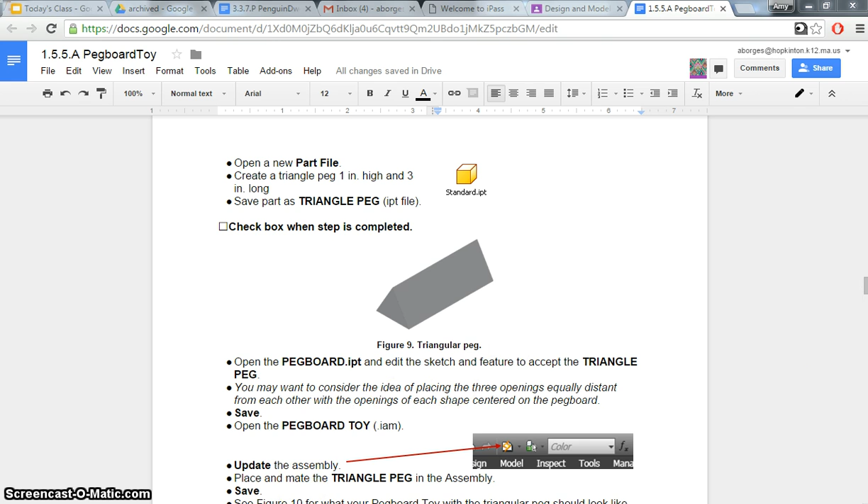So open up Inventor, and we're going to start a new part. We're using standard.ipt.

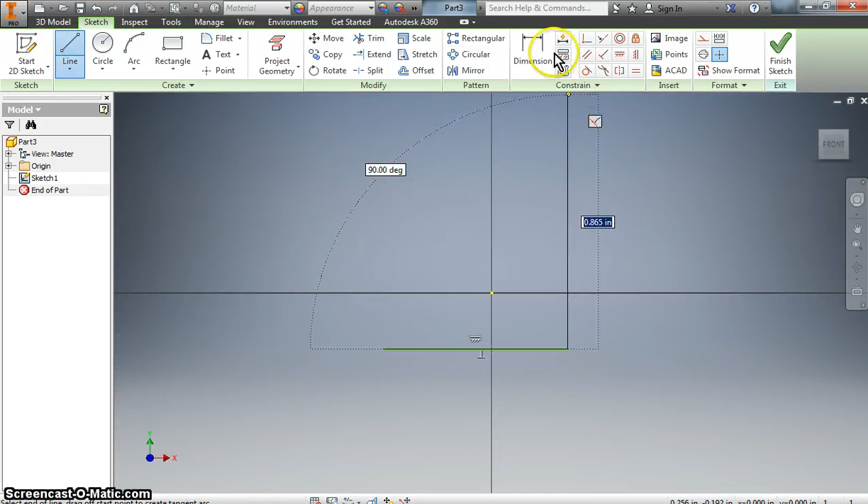To draw the triangular peg, we're first going to place line segments for the base of the triangle as well as the height of the triangle. So I want the base, and then I'm going to dimension it to 1 inch.

Go back to line. In order to ensure that I'm drawing my line height right in the center of this base segment, I'm going to put my mouse along, and it's yellow now, and when it turns green, that means it's the center point. So it turned green, click once to start the segment, click again, dimension that to 1 inch.

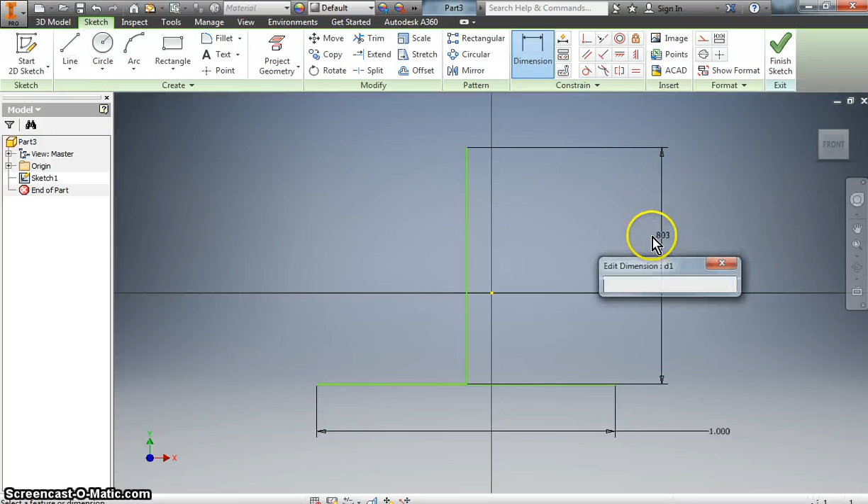Now we can go back to line and connect the top to one side of the base and the top to the other side of the base. Can finish the sketch. We'll go to extrude.

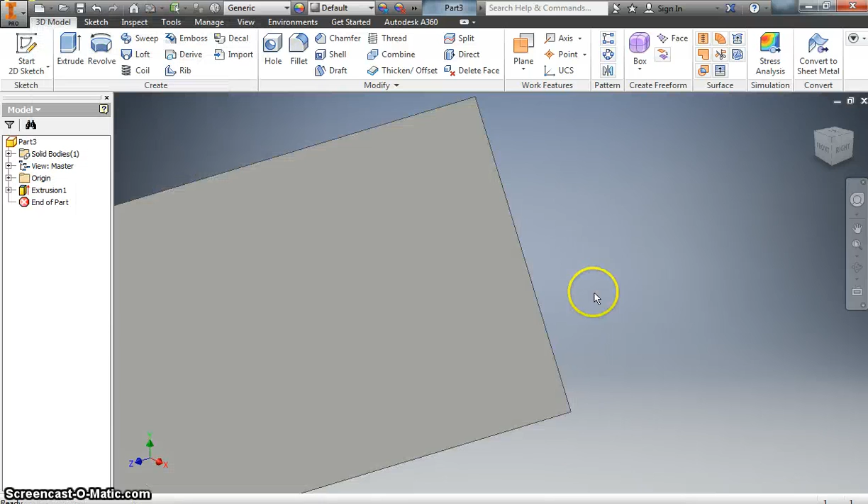I want this peg to be similar to my other pegs, and I'm going to extrude both halves, a 3-inch extrusion. Now you can first change the material and then change the color.

Orange is nice, so File, Save As, triangular peg. I'll call it 2 because I had made one earlier today. Say save.

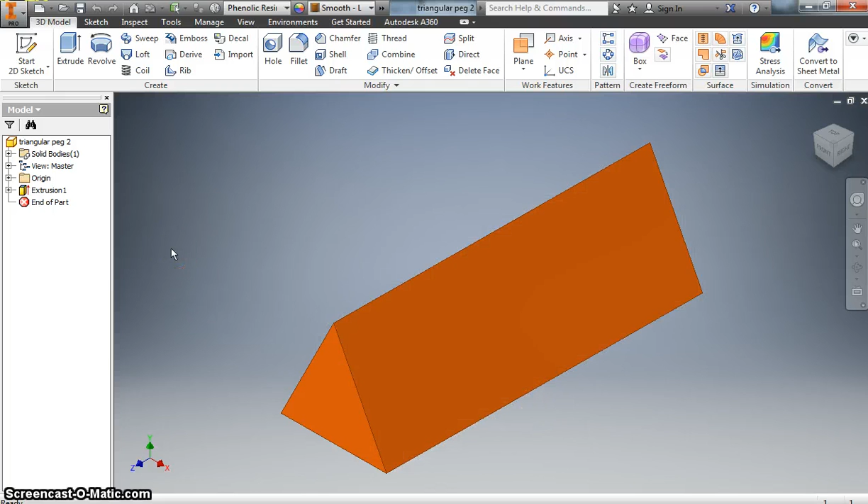Now we need to go back and modify the pegboard toy to have a triangular cutout so that we can place this peg. Go to iPro, open, and you want to open your pegboard toy assembly with the ends.

So we want to modify this purple piece. It's purple in my example. So you can double click. Once you double click, you see the browser shows you what you're able to edit. So you want to edit the sketch that had the circular and square cutout, which for me is embedded in Extrusion 2. So I click the plus sign, and then I'm going to right click the sketch and edit that sketch.

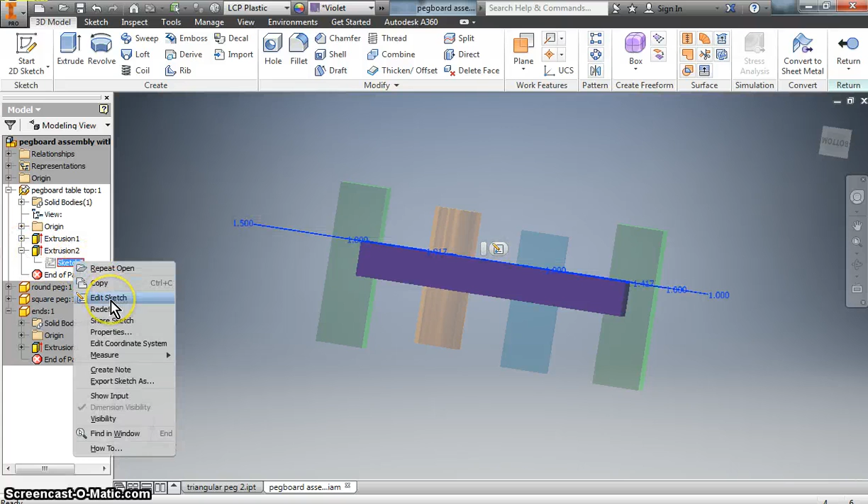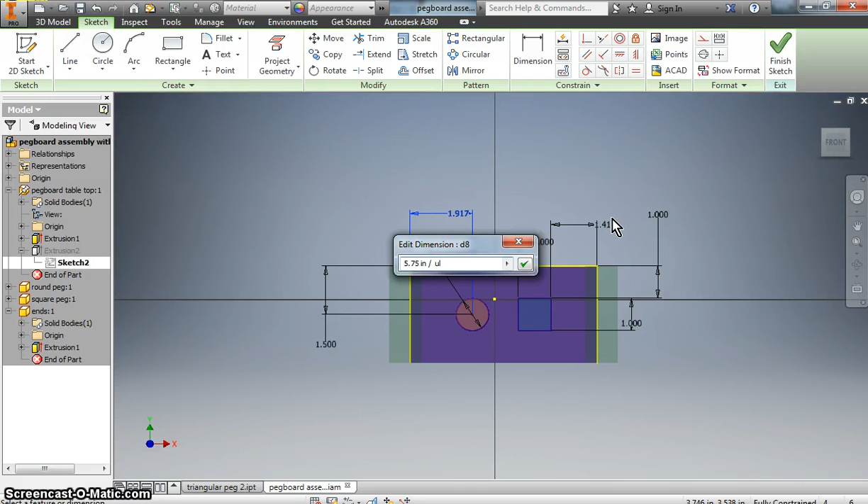Turn the view cube around. Okay, so I want to go back and modify my horizontal alignment dimensions. The horizontal alignment dimensions will provide space horizontally for the triangular peg. So I'm going to double click this figure, and instead of divided by 3, I'm going to change it to divided by 4, which will make room for our extra feature.

And I'm going to double click this one. Instead of divided by 3, I'm going to change it to divided by 4. And then I can finish my sketch. They didn't move, so go up to this top bar and click Global Update, and they will move.

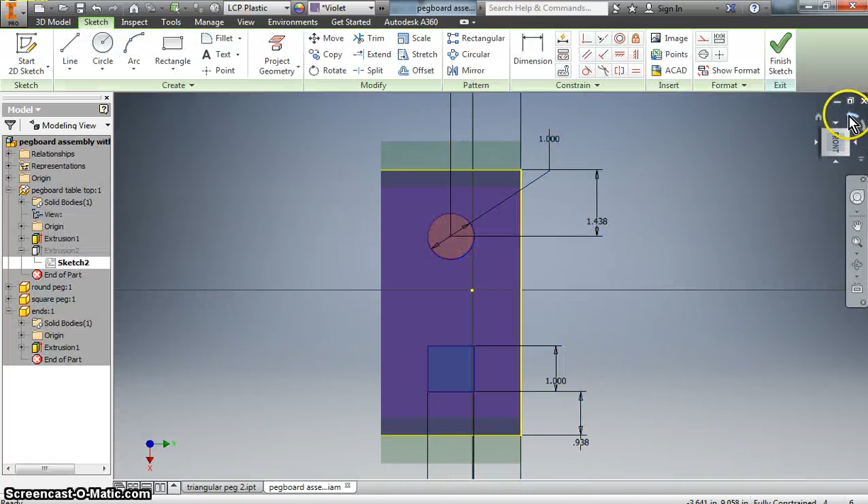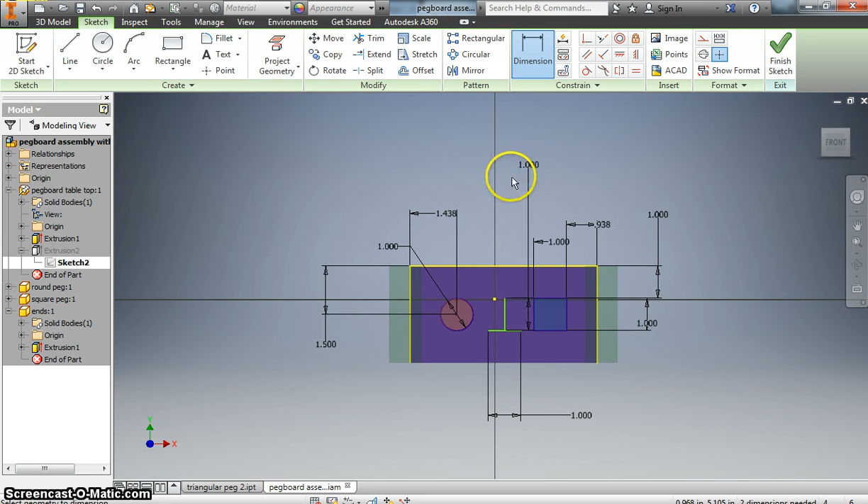I'm going to go back to sketch 2 to edit and make the triangular cutout. I'm going to make the triangular cutout just like I made the triangular peg, with a base of 1 inch and then a height of 1 inch, and remember to put the height directly in the middle. And then make the triangle complete.

And then I can space the triangle cutout. I need to make sure that the base of the triangle to the edge of the tabletop is 1 inch, which it already is for me. And then the center height line of the triangle to the edge of the tabletop should be 5.75 divided by 2.

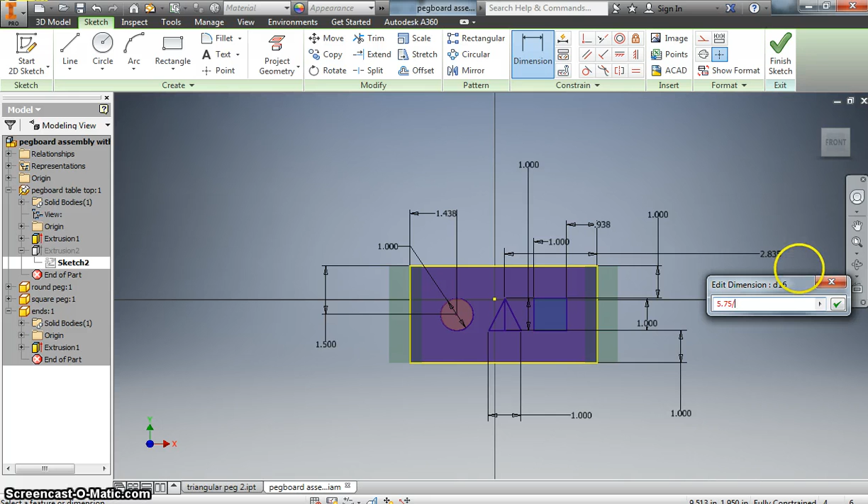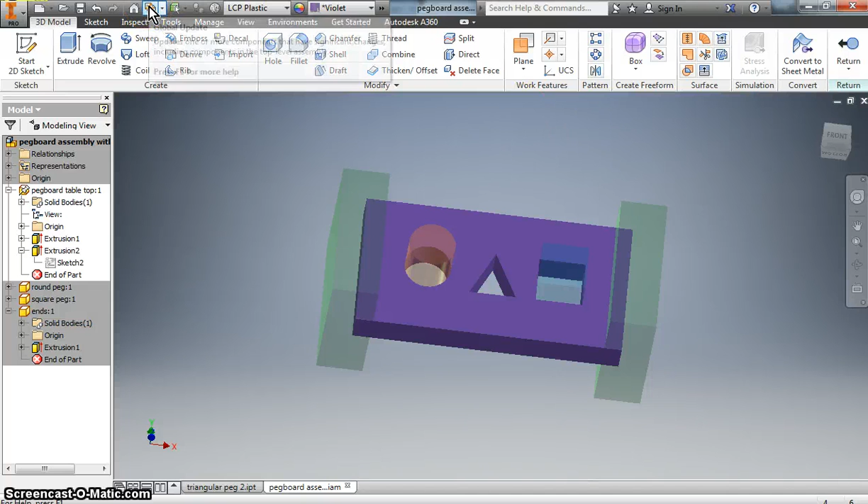Can finish the sketch. Now it still didn't cut out that feature, so we need to go back to extrude. Use this button to edit the extrusion. Click profile, and then click both halves of the triangle and click the green check mark. Excellent. Click the global update button again and the return button over here.

There we go. We're ready to go to place and to find our triangular peg.

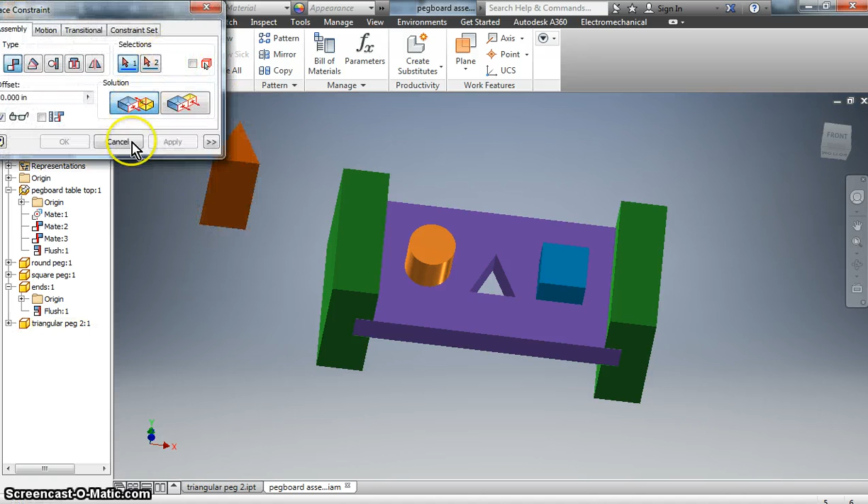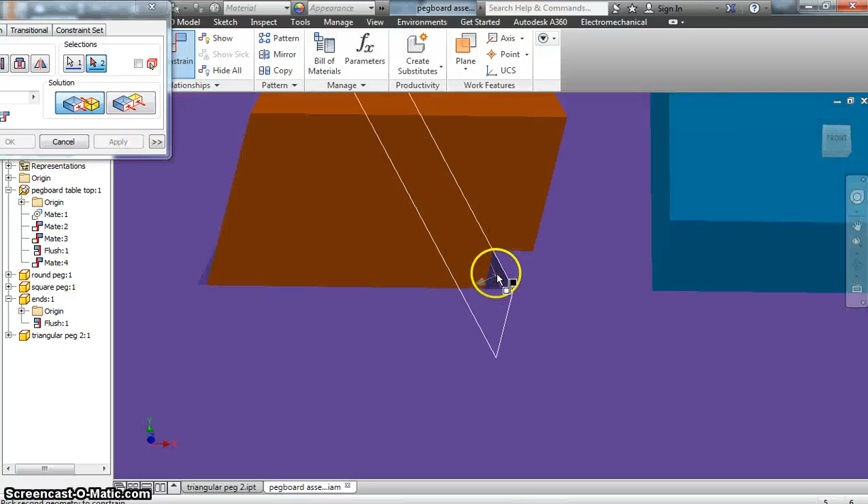Click once to place it, click escape to get out of that. Now I'm going to go to constrain, and I'm going to move around so I can click and select this face to that, apply. Now I want to mate this face. This is where it can get tricky, because you want to get the correct faces applied.

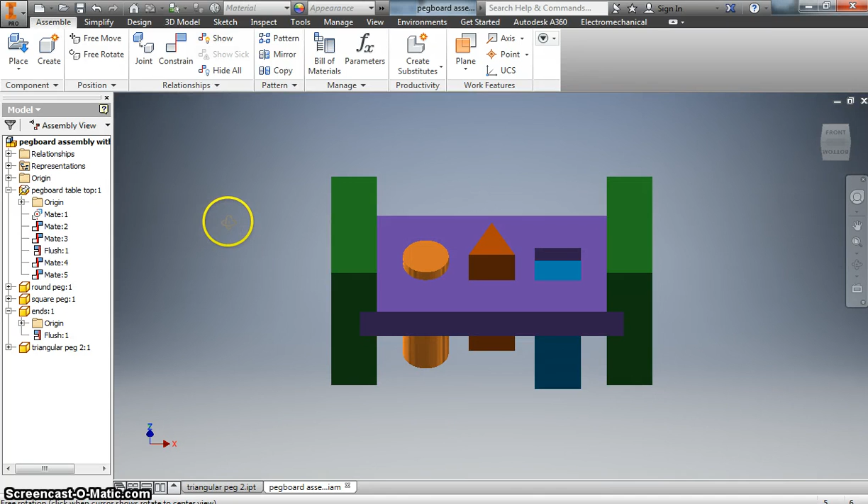So I mate constrained 2 faces of the triangular peg, and I see that each of my pegs is moving properly. Remember to ground the pegboard table piece so that this doesn't move. All right. So ensure you save this, and we can go on to our mallet. Say yes to all, and then okay.

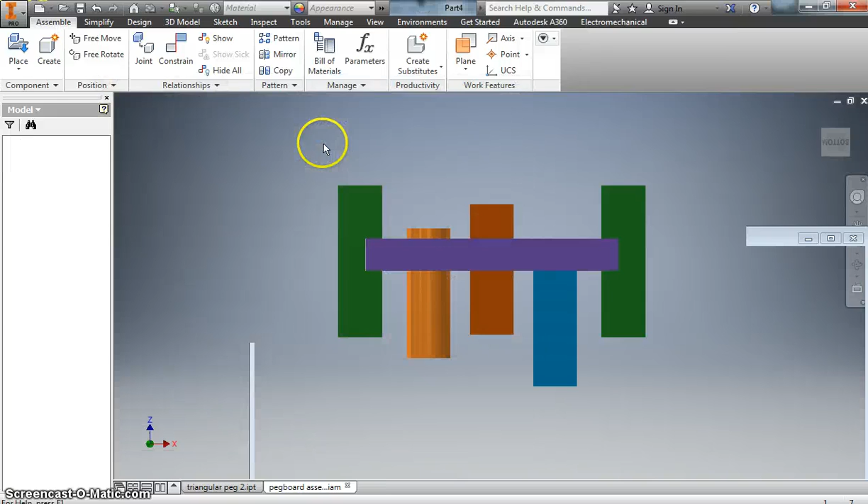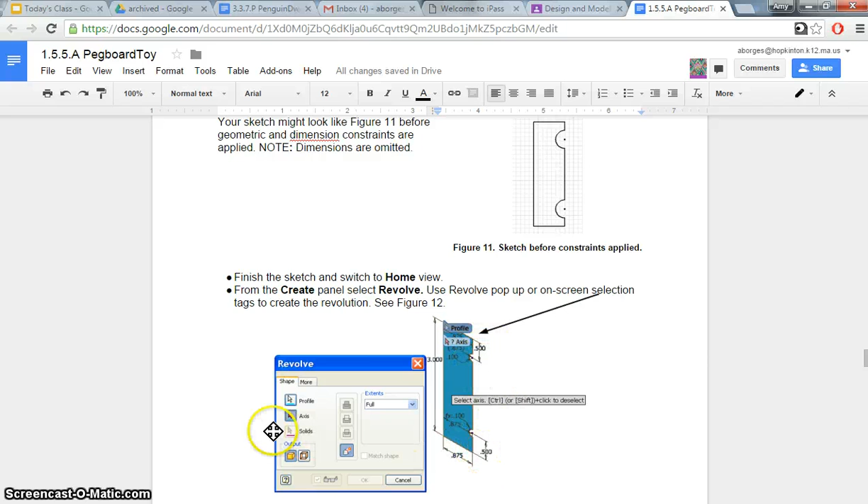So you're going to go to iPro, new, and we want a new part. We're standard.ipt for the mallet head. Going to start a new sketch. And please see the instructions for the dimensions of the mallet head. We're all set there. So we're going to start with this shape, and here are the dimensions. So it's like a rectangle with 2 circles dimensioned. The rectangle should be 3 by 0.875, and these circular features should be spaced appropriately. So consult that for dimensions.

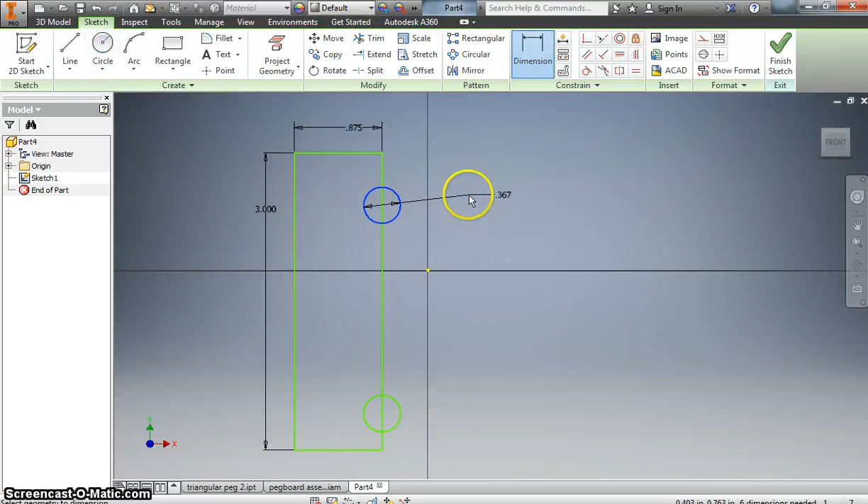Let's start with rectangle and dimension height of 3. This should be 0.875. We're going to add some circle features and then dimension these circle features. 0.3 should work well. And now space the top edge to the center of the circle. Should be 0.5. Bottom edge to center of the circle, 0.5.

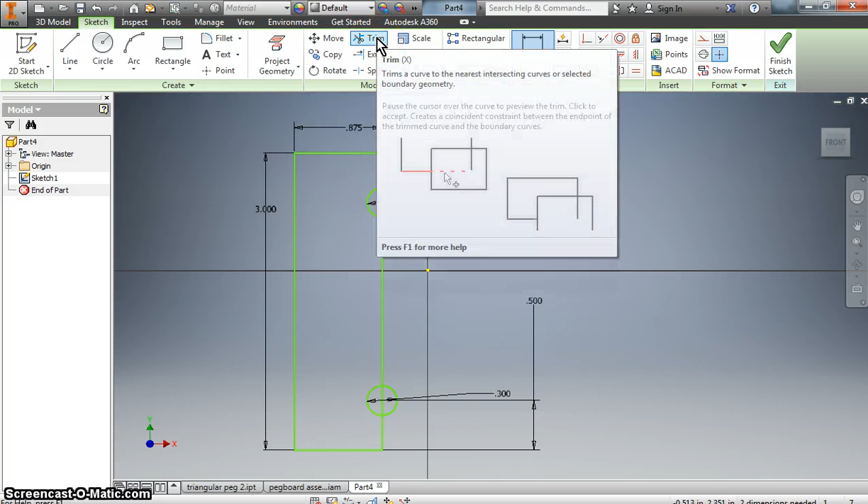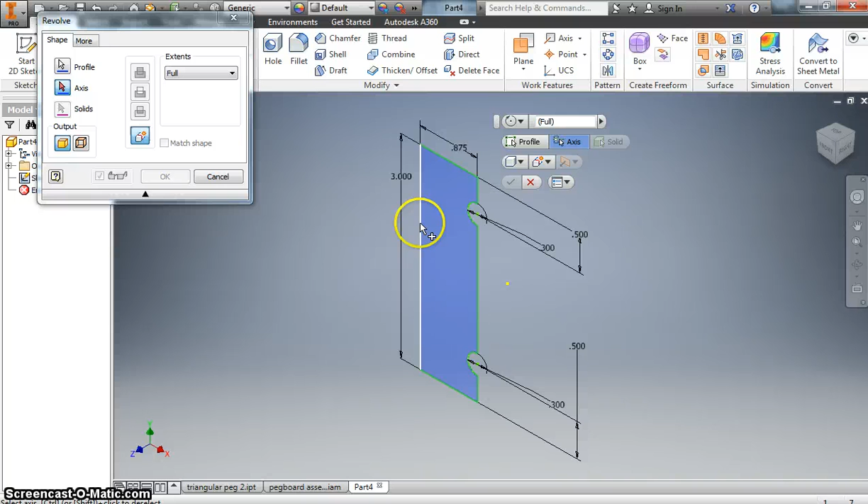Now we're going to go to the trim function. We're going to click on that and that to get it to go away. Click on the right part of the circle and then this. So when we finish our sketch, we should see, I think that's just part of the dimensioning, we'll see. Let's go to revolve, click the left side of that sketch you drew, and there's our mallet head.

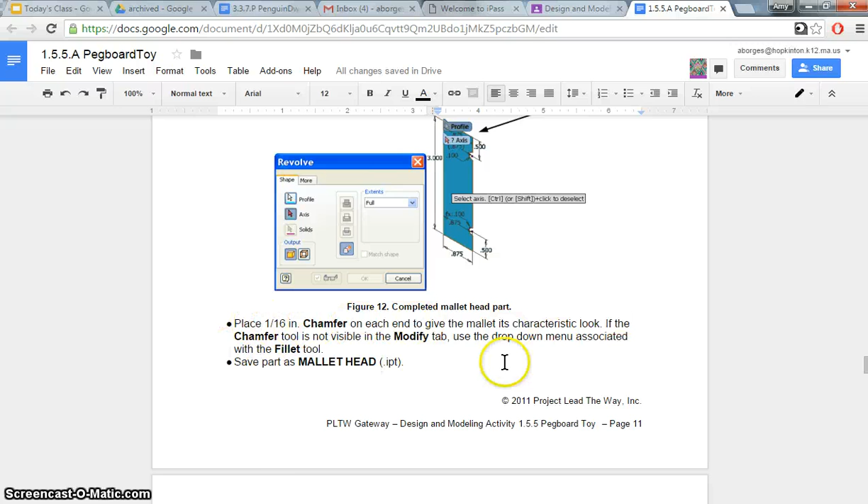The instructions say to place a 1/16 inch chamfer on each end. So chamfer, click this end, click that end. I think that's 1/16. If not, to double check, we can do 1/16. All right. Next is making a hole for the mallet handle.

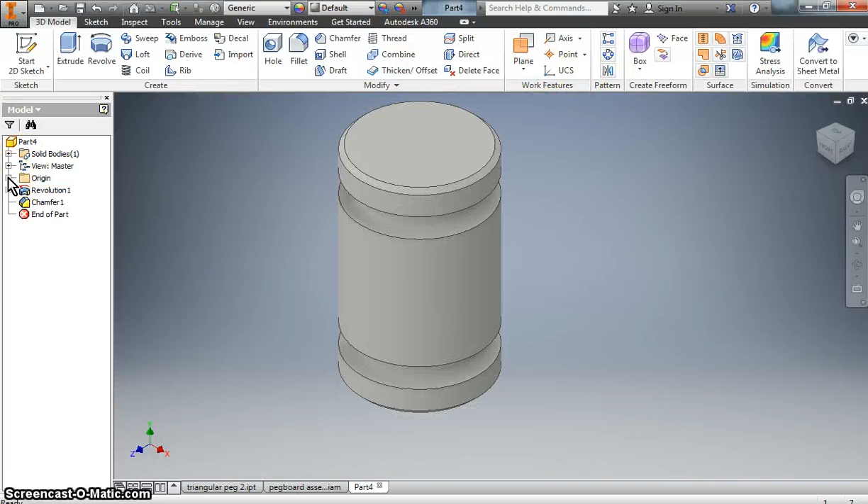We're going to click on this plus sign next to origin, and it says to place it on the YZ plane. I'm going to place a work plane. Click the YZ plane, and then click again, and there's the work plane. So what I did was selected plane, then went to the plus sign next to origin, clicked on the YZ plane, and then clicked to place the plane.

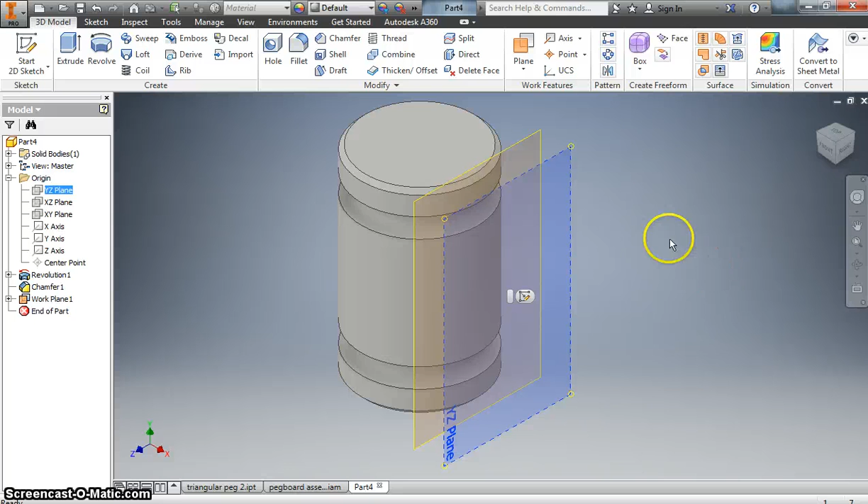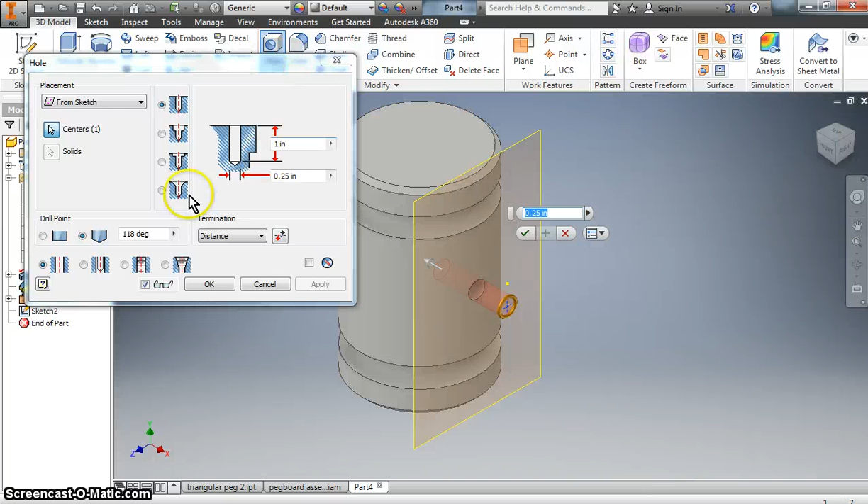Then create a sketch. I'm going to place a point, and I'm going to move my mouse along these features to ensure that I'm placing the point in the center. Finish sketch. Go to your hole function. And again, consult these for the specifics. So we want 0.875 inch drill depth, 0.625 inch tap depth, 5/8 of an inch size, and 5/8-11 designation for the screw threads. So let's see if we can get all that.

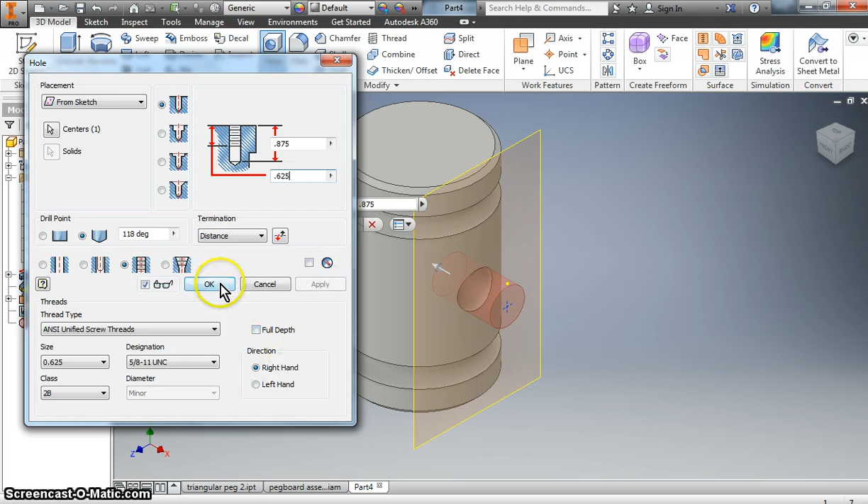So I want to click this first, down here for this tapped hole. Then this was 0.875. This was 0.625. This, I don't remember, let's see. 0.625, 5/8-11. This changed up here, so let's change that back to 0.675. Is that right? Doesn't look right. 0.625. And let's say OK and see what it looks like. And there's my threads inside.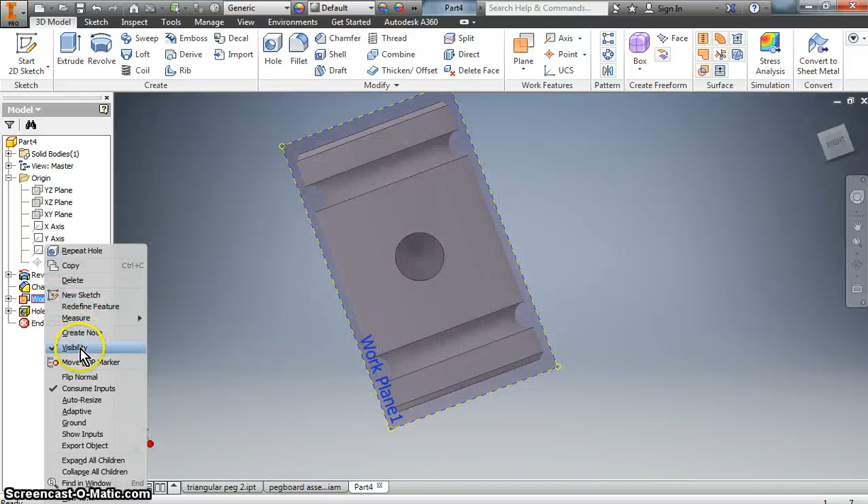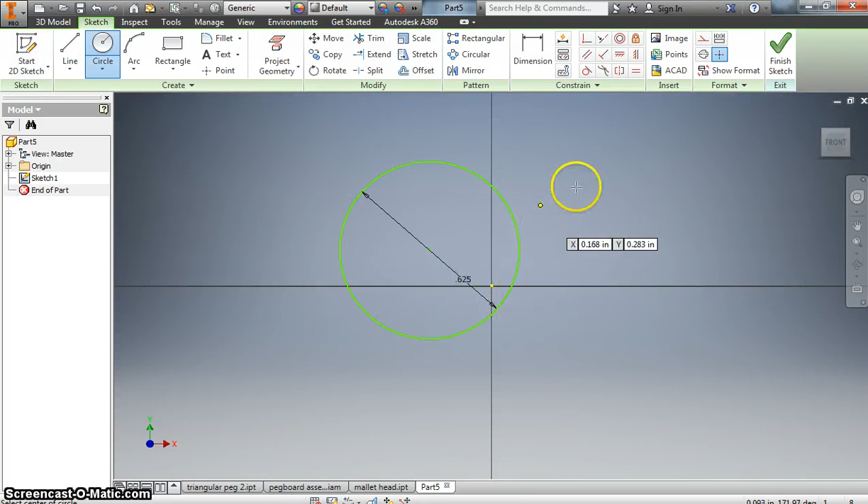We can right click on the work plane and check visibility. And now we're ready. You see your threads, and we're ready to create the mallet handle. So iPro, save as, mallet head. I'm going to create a new part for the mallet handle. The mallet handle is five-eighths inch in diameter and 8 inches long. Five divided by 8. Extrude to 8 inches long.

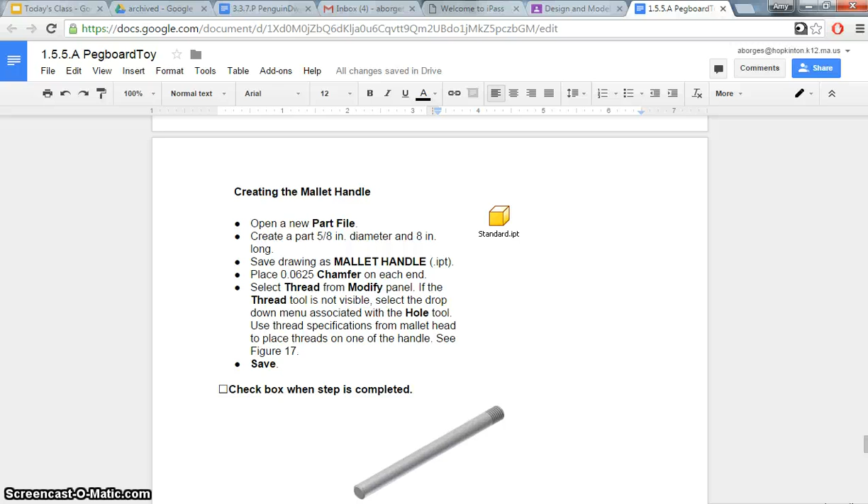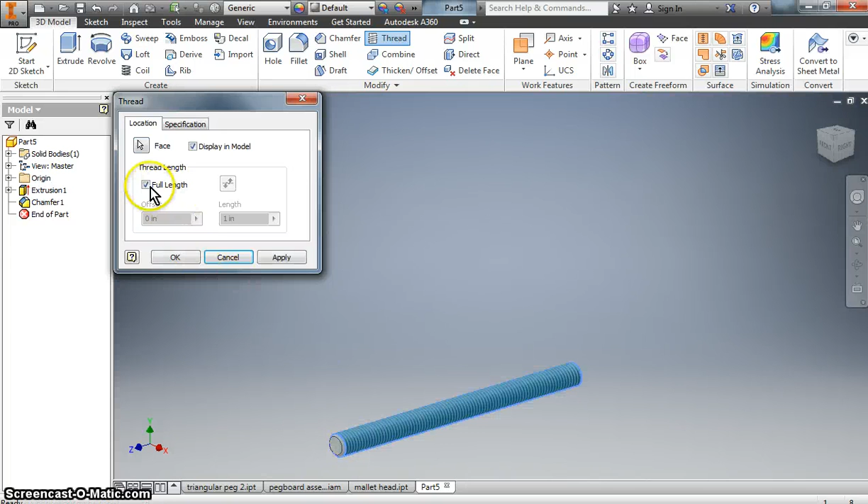It says to place a 0.0625 chamfer on both ends. And then select thread and place threads on one end. Thread. What kind of threads do we want? We want 5/8 threads. 5/8 doesn't seem to be there, so I guess 3/4 is close enough. Or it might be in here. Huh. There we go. File, save as, mallet handle.